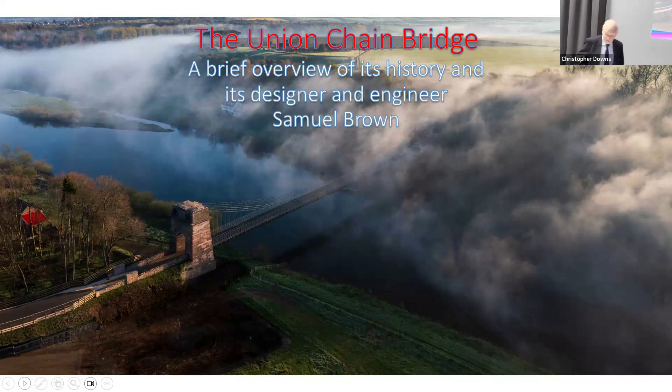I beg your pardon, there we are. In his companion guide to Northumbria, Edward Grierson in 1976 said that the Tweed is a beautiful river throughout its length, and the scene at Union Bridge is nothing less than idyllic, and so it is. I assume that most of you have visited the Union Bridge at some time, but perhaps not. It is a hidden gem. It is a Guinness World Record holder, as you probably know.

And you probably also know that within this region, we have the world's oldest vehicular suspension bridge, or at least half of it, because the other half of it is across the border in Scotland. It's a remarkable world record to hold, the world's oldest vehicular suspension bridge, down two relatively minor country roads in North Northumberland and Scotland.

It's a forgotten gem, so forgotten, in fact, that in his definitive history of bridge engineering, published in 1911, H.G. Tyrrell said that the Union Bridge was blown down in a gale only 6 months after it was completed. Well, we know that it wasn't. We know that it survived for 200 years, and following the recent restoration is likely to survive for another 200 years. But that calumny probably originated from the blowing down of a pedestrian suspension bridge further up the River Tweed at Dryburgh in 1817. I think that's where Mr. Tyrrell got his lines crossed.

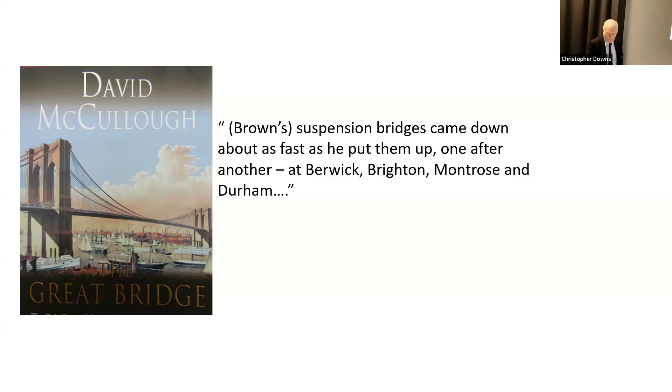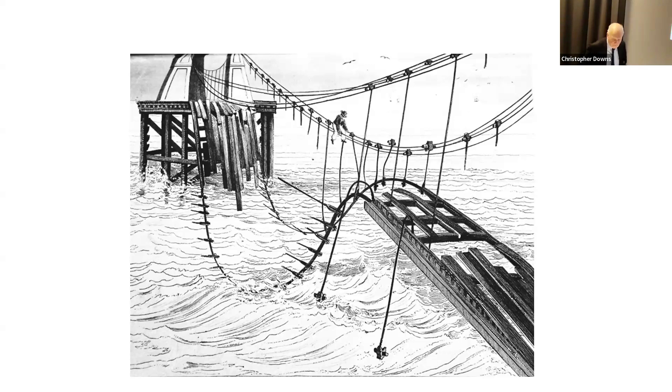So why did we need to build a suspension bridge in that remote part of North Northumberland, or North Durham as it then was? Well, towards the end of the 18th century, there was an increasing need in Berwickshire, in the Berwickshire Merse, for coal and lime, especially for the agricultural parts of the Merse, from the pits and lime works of North Durham.

Because you remember at that time, what is now North Northumberland, the ancient areas of Norhamshire and Islandshire formed part of the detached enclave of County Durham known as North Durham, as did the Farne Islands and Monk's House, that you will know, between Bamburgh and Seahouses, where the monks landed from the Farne Islands. It itself, strangely, was a part of County Durham, a detached part.

So we're talking about, in this case, taking lime and coal from the pits and lime works of North Durham to Berwickshire, which didn't have any resources like that. And we tend to forget these days about just how much of a barrier a river can be, or certainly was in those days.

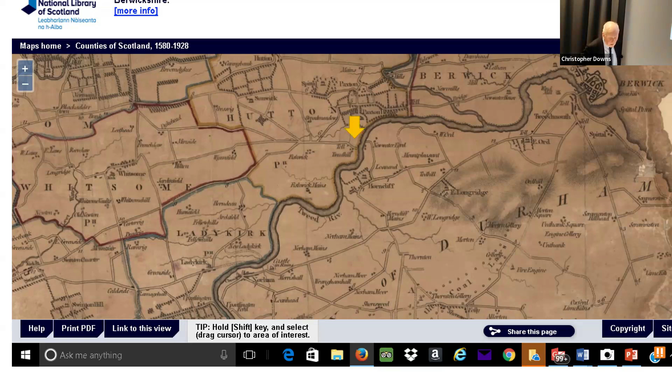He spent all his career in the Royal Navy before he moved in his retirement into the manufacture of chains. He served for the most part in the Newfoundland and North Sea stations, and very soon developed an interest in improving the rigging of His Majesty's ships by replacing hempen rigging with iron chains. And he patented a design of open chain links for rigging and other purposes, and actually persuaded the Admiralty to allow him to test his ideas on HMS Penelope in 1806. He retired in the rank of commander and became an honorary captain later in life in 1842.

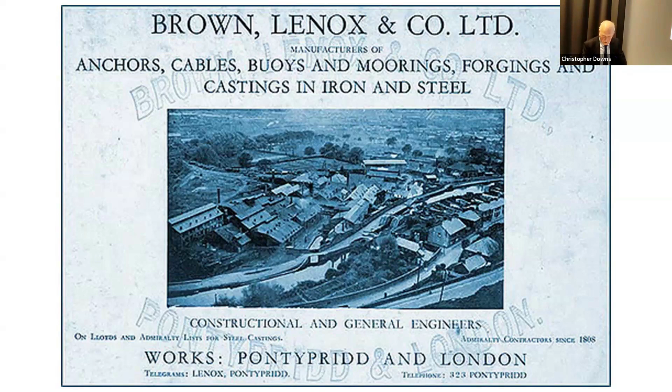In 1817, Brown took out a patent for specification for the construction of iron bridges of suspension, as he called them, and it's on this specification that the Union Bridge was eventually built. But some 15 years before that, the Berwick and North Durham Turnpike trustees had taken out an act in Parliament enabling the trustees of the Berwick and North Durham Turnpike Trust to construct a crossing of the River Tweed between the parishes of Horncliffe in North Durham and Hutton in the county of Berwickshire.

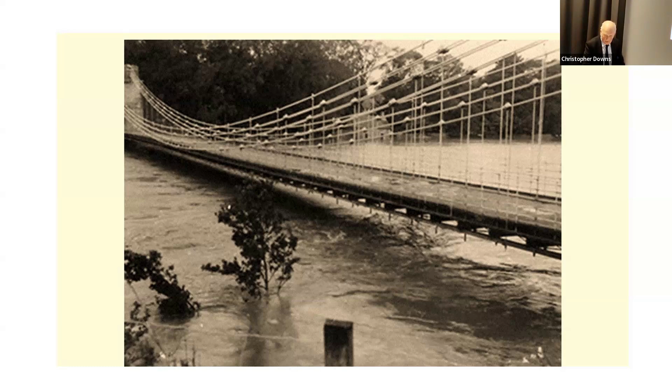So the decision of the trustees to build the bridge in that location was absolutely vindicated, and the bridge has survived in that location to the present time. Let's just have a look at the timeline for the construction of the bridge. We'll remember the Parliamentary Enabling Act in 1802. In 1817, you saw the patent that Brown had taken out 15 years after the Enabling Act.

And in 1819, the contract was let by the Turnpike trustees to Brown based on his drawings of September 1818, which themselves were based on the patent, the detailed patent that he had taken out. On August the 2nd in 1819, the foundation stone was laid by the chairman of the Turnpike Trust, William Molle, and remarkably and extraordinarily, less than a year later, the completed Union Bridge was opened by Lord Hume. So it was built from scratch in less than a year.

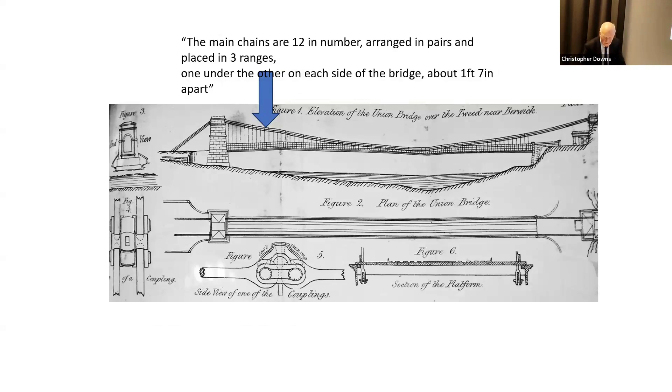Says Drewry, the main chains are 12 in number, arranged in pairs and placed in 3 ranges, one under the other on each side of the bridge, about 1 foot 7 inches apart, and the arrow points to the chain in place. There it is today, with the pairs of chains, one above the other, on each side of the bridge, forming 12 chains in total.

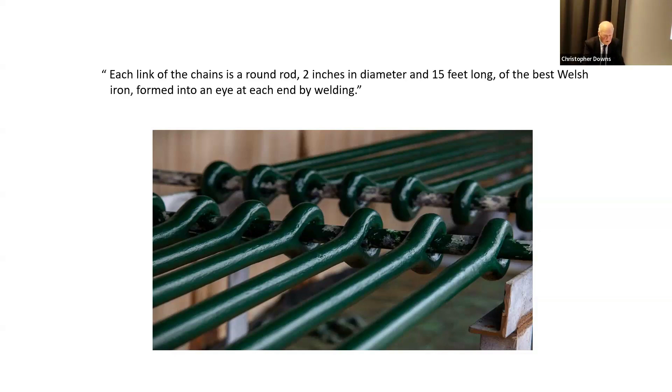There are the chain rods, 15 feet long, 2 inches in diameter. Those are as restored or as newly made during the recent restoration, and as Drewry says, formed of the best Welsh iron. Well, they were in 1820, and formed into an eye at each end by welding. The long links are connected together by short open coupling links, 6 inches long centre to centre, made of iron and united to the eyes of the long links by oval bolt pins, which pass through both.

That shows you the link itself. The 2 bolt pins, 6 inches apart. There's the pin, the left-hand pin and the right-hand pin. And I have an example of one of the wrought iron links rejected during the restoration, and the pin, as on the diagram, that fits through the link.

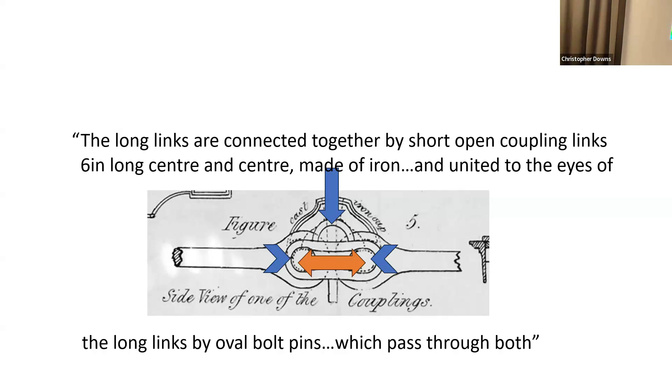Chain bars, says Drewry, 15 foot long, and they actually weigh 15 stone, with links, pins and saddle, and the hanger connecting the chains to the decking. There is the hanger leading down from the chains and supporting the decking from the chains.

Says Drewry, the chains pass through openings in the main pier on the Scottish side. The Scottish pier is a freestanding pier, the oldest masonry pier in Scotland. On the English side, the pier is actually built into the cliff behind. But the chains pass through the openings in the main pier on the Scottish side, one above the other, about 2 feet apart, says Drewry.

The links of the chains are made very short at that part, that they may lie on the rollers without being bent. Well, the chain rods on the top of the Scottish tower were 3 feet in length, just miniature 15-foot ones, reduced to 3 feet in length and weighing 3 stones.

And in my talks in the local area, I normally carry a 3-foot rod around with me in the car, but it proved too much to bring it on the train to you tonight, unfortunately.

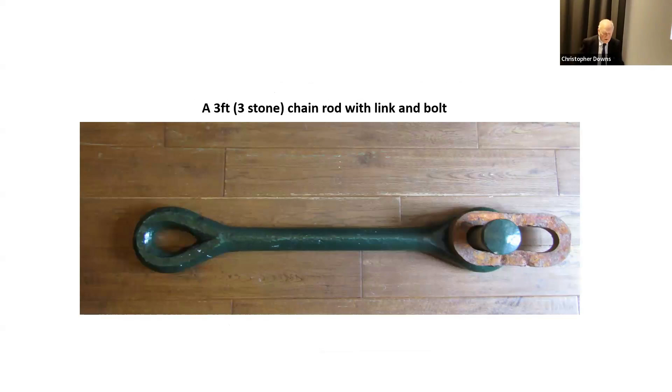But there we are. From the points of suspension, the chains pass down 24 feet into the ground and through large iron holding plates, 6 foot by 5 foot. That's in the ground on the Scottish side, about there. And they're kept down by large mound stones and other materials piled up to the level of the road. There's a photograph of the friend's 3-foot chain bar with the link and bolt in place.

Going back to the previous slide, as I've said, from the points of suspension, the chains pass down 24 feet into the ground, said Drewry, and through large iron holding plates. Now, just before the restoration began, our patron Professor Paxton's friend in Edinburgh at Heriot-Watt University, Dr. Colin Stove, who is the managing director of Adrok, a survey firm that usually does survey work throughout the world, identifying oil deposits by atomic dielectric survey, rather obviating the need to drill through the Earth's crust to see if there are oil deposits beneath. You simply use this laser survey work, saving a lot of time and trouble.

But he came and did a survey of the Scottish anchor plates before the work started, and actually showed the plates at a depth of 7.3 meters below the ground, which was very close to what Drewry said when he said they were 24 feet below the ground.

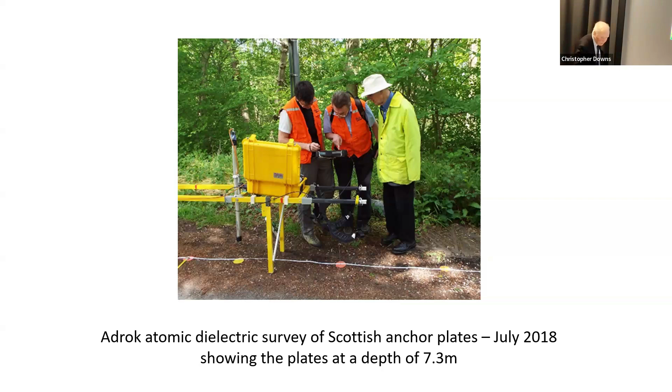Those two anchor plates, and this is one of two points where I actually encroach into the restoration, with apologies to Simon, were replaced on the Scottish side by an anchor block of about 350 cubic meters, poured over the course of 2 days. So that huge anchor block has replaced the iron plates, which are still there. Actually, the contractors, I think, Simon, didn't get as far as the anchor plates. They're still there under the new concrete, very impressive anchor block.

On the English side, says Drewry, the chains lie also upon cast iron plates laid into the masonry. The extremities of the chains are fastened, as on the Scottish side, to large holding plates of the same dimensions. But instead of being sunk deep in the ground, they're placed vertically, rather above the level foundation of the pier, and they bear against a horizontal arch of masonry dovetailed into the rock. So instead of being in the ground behind the tower or the pier, as on the Scottish side, they're actually back into the rock above the pier on the English side.

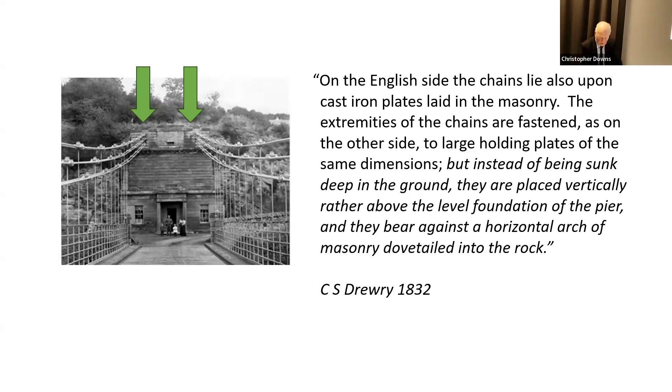And so everything went happily until 1902, when the then surveyor of the Tweed Bridges Trust, who'd taken over from the Turnpike Trust, took fright at the security and integrity of the bridge, and recommended to the trustees that it ought to be strengthened with, in Joseph Bean's words, new and additional steel wire cables, the practical effect of which would be to strengthen the bridge to such a degree as to provide an equivalent to a new bridge, because one of the options the trustees had to consider was whether to abandon the suspension bridge of 1820 and build a new one at colossal cost.

But the cost of the proposed improvement, the addition of these wire ropes on both sides of the carriageway, would be approximately £1,450, very much cheaper than building a new bridge. And the trustees agreed to that and installed the wire rope, as you see there, with additional hangers supporting the decking. And as Simon will no doubt tell you, preparatory to the restoration of 2020, it was found that the 1902 rope was doing more harm than good, and it was decided not to replace it.

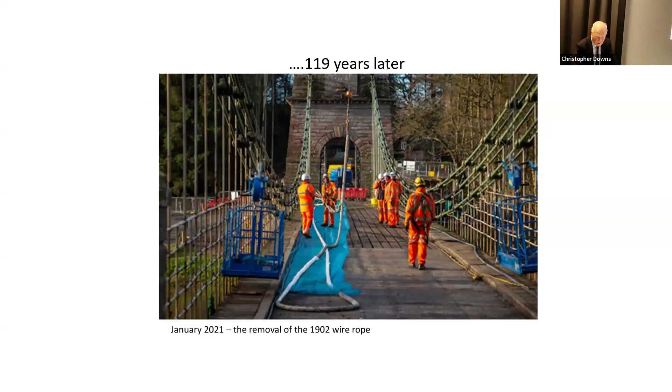Let's just go back to what is, I think, or what we believe is the earliest known photograph of the bridge in the middle of the 19th century, with its original decking, a chap taking his ease on the downstream footpath, a horse and cart just about to enter the bridge from the English side, and there is the toll house keeper, Edward Roxburgh, and his family standing in front of the toll cottage, two-roomed cottage, under the portico.

And you'll see the arrow pointing to some sort of emblem just above the parapet of the bridge, which is actually an entwined rose and thistle device above the maxim, "United strength is stronger," as they said in 1820 and have continued to say over the decades, and that plaque on the English side, and another one, an identical one on the Scottish tower, they were restored during the restoration works.

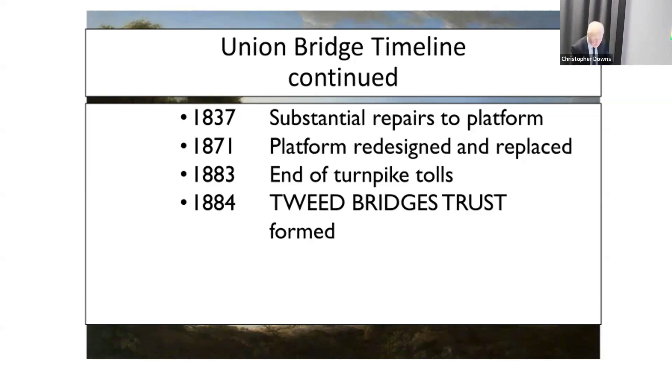The toll cottage that you saw in the picture was condemned in 1934 and demolished in 1953. And the pier of the English tower was refaced with the facade of the portico of the toll cottage pushed back into the face of the pier. In 1974, there was a complete platform replacement, and the suspension chains and the Scottish tower bearings were overhauled.

And in 1986, somewhat controversially, the Tweed Bridges Trust was wound up, and responsibility for the bridge passed to the two riparian local authorities, as I've said, Northumberland and Scottish Borders Council, but also influenced, because it's a cross-border bridge, by Historic England and Historic Scotland, Natural England and SEPA, etc., and all these agencies had to come together, along with the maritime agencies, as Simon would perhaps tell you, in 2020, to authorise the works on the bridge, and even to the extent of the lottery funding.

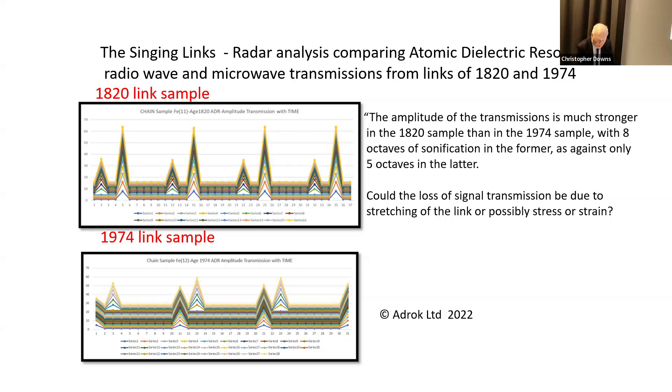And I have to say I found that a marvellous colour scheme, because on a cold autumn morning, with the mist rising from the River Tweed through the chains of the bridge, it really did present a quite ethereal image, which was quite attractive. But what we have now is, I think, as Simon will confirm, more or less the original colour scheme after the first 2 years of an all black drab structure.

Every time we went to fix the bridge, we had to get listed building consent, and I think after a number of times, they got a bit fed up with what we were doing and insisted that we wrote a conservation management plan, which is what Ted referred to. This really marked the start of the serious efforts in trying to figure out how we were going to restore the bridge. It spelled out in great detail what the current state was, what needed to be done, and what invariably would happen if we did nothing.

Northumberland County Council has its own internal capability. So over a 4-year period, we designed and brought together a restoration scheme, working very closely with Historic England. We also spent quite a lot of time working out how we were going to fund this.

We did have an original abortive attempt at National Lottery Heritage funding, but after a couple of years we went back with a different outlook, and through 2 rounds of bidding we were successful in getting the £3.1 million award. And that effectively became the seed funding that then convinced Northumberland County Council and Scottish Borders Council to contribute the remaining costs of roughly £6 million. The contract was awarded in June 2020 and works commenced on site in August of that year.

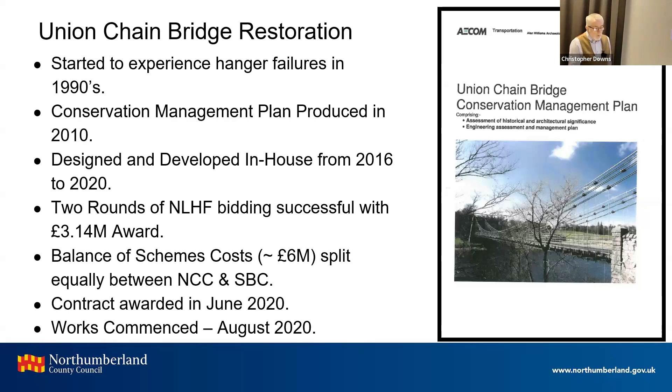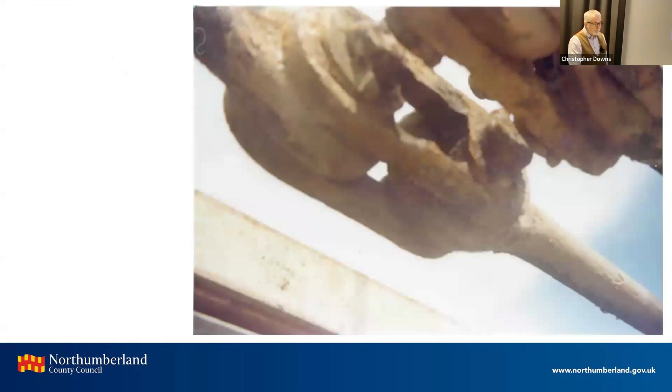We decided for our refurbishment that if this bridge was going to last for another 200 years at least, then the only real way of doing it was to dismantle it completely, look at every component, repair and replace as necessary. It seems quite a daunting task, but the bridge is actually quite a simple structure. The difficulty is figuring out how you're actually going to do that. So in that photograph, you can see we have an aerial ropeway with an underslung platform, and that's what provided the access for the works.

So starting from the English end, we dismantled one bay at a time, one bay being 3 hangers and the associated deck. You can see the access gantry suspended off catenary wires. There's 2 smaller individual man gantries as well, plus a cable crane, which traditionally is used in the logging industry to haul trees off mountainsides, but in this instance it was used to carry the removed components back to the land. And you can see there a bit more detail of the guys actually dismantling. By this point, the wire rope had gone.

The beauty of the access was it didn't really matter to us what the river did. Other options included having jack-up barges in the river. There was quite a significant flood at one point, but we carried on working unhindered.

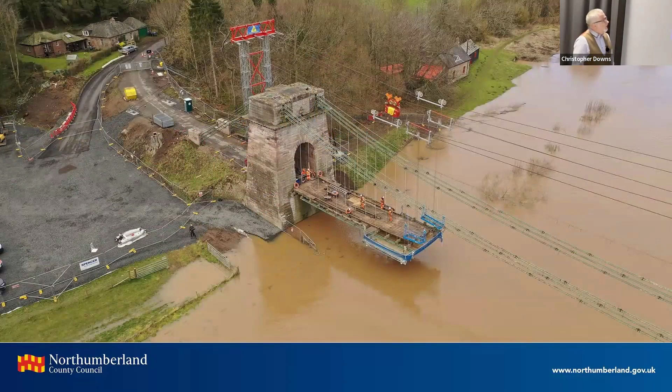Obviously, once you've taken all the deck off, the next thing is to dismantle the chains. This was done by supporting the chain on the catenary wire with pulleys and strops. If you tension the catenary wire, it picks the chain up, it allows it to be disconnected and then basically just hauled in. You can see there's a smaller cable there. All the pulleys are connected with a hauling rope, and there's a pulling winch at one end and a braking winch at the other. So basically just like drawing a set of curtains, just pull it back, take off 1 bar at a time,

repeat that. Obviously, how do you get the pulleys and strops on? Well, guys have got to walk out on the chains to connect them. There is no other way of doing it. They are harnessed on. You've done it once, just repeat it 11 more times and you end up with no superstructure. It's gone completely. All that's left are the temporary catenary wires, and you can see the cofferdam excavation for the anchor block that Ted referred to.

The planned works for this refurbishment scheme: replacement of the chain anchorages, this could be an entire talk in itself. So a new mass anchor at the Scottish end and new drilled rock anchors at the English end.

Replacement of the timber deck. I forget how many times it's been replaced in the last 200 years, but I don't think it had been touched since the 70s, so it was quite rotten. Obviously, there were quite a few masonry repairs and replacement to do. The local sandstone is quite soft and quite variable in quality and can weather quite badly.

As Ted said, 1902, 1903, I think is when it was started and when it was finished. We found in the analysis that the wire rope took less than 1% of the live load on the bridge, and that's fundamentally the difference between a solid iron bar and a wound wire rope. Completely different stiffnesses. It took no load. It made the original structure slightly indeterminate, and it caused a lot of damage because there wasn't a lot of tension in it, and it would sway from side to side, and its hangers would damage the chain bars. So that was removed. We had the refurbishment and repair of all the wrought iron hand railing,

As Ted was describing earlier, fundamentally there are 6 pairs of chains. The chains are connected together with links in black, pins, a gib key and a washer to stop the pin coming out from the links. 2 pairs of chains form a knuckle upon which sits a hanger cap, which the hanger sits in and is locked in place by a wedge.

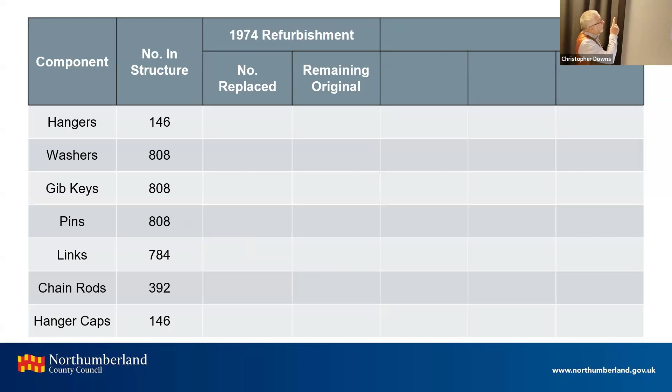In the 1974 refurbishment, they mainly concentrated on links. They replaced 744 pins with the associated gib keys and washers. And they also replaced 422 of the links. So there you can see the remaining original components after that refurbishment. The replacement components were all spheroidal graphite cast iron as opposed to wrought iron. It was thought to be the most appropriate material at the time.

So what we're going to go through is look at what we did in the 2023 refurbishment. As part of the listed building consent, we had to put forward, working with Historic England, an estimate of the number of components that we expected would need to be replaced as part of the consent process. And we'll go through all these one by one.

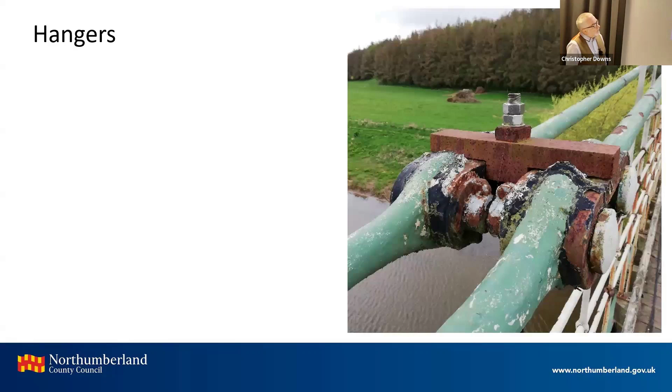The hangers were problematical because they started to break, and we were trying to understand why. For the ones that had broken, the hanger cap was put into storage, and a simple stainless steel threaded bar and flat plate put in its place. We thought the problem was because the hangers are only 1 inch in diameter. Where they fit into the hanger cap, they're actually locked solid with the fishtail and the wedge. They can't move, they can't rotate. The bridge is very lively and the deck does move relative to the chain. And we thought, having looked at the failure pattern where they had broken, it looked like it was a fatigue effect.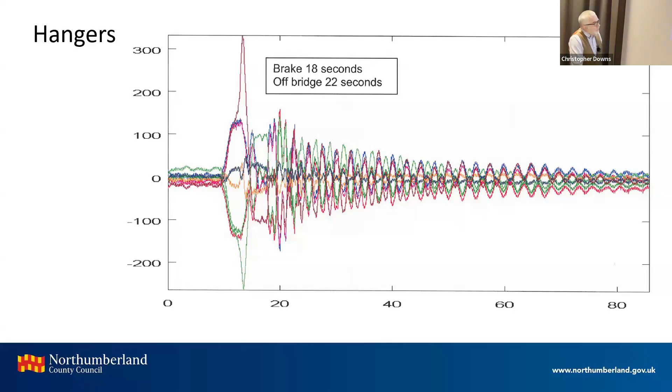So the problem was how to replace it. We looked at all different things, but nothing could replace that original detail. So the brute force approach, in discussions with Historic England, was to replace all the hangers with hangers made from high yield steel, which is sufficiently fatigue resistant not to succumb to that effect in the future. You'll notice some strange ends on those bars we call the fishtails. We decided to make that a slightly better detail.

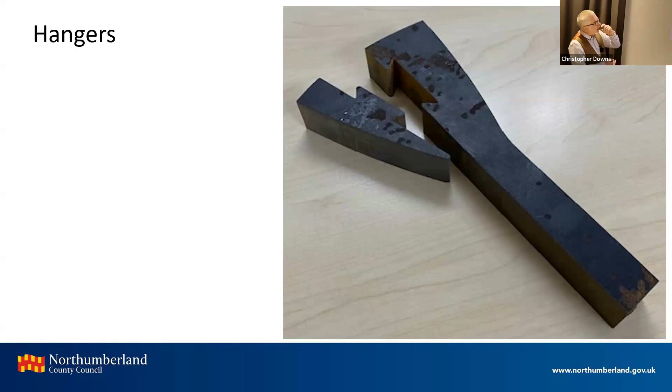The original hangers just had what we call a fishtail, which is a one-sided wedge, and then a secondary wedge that is hammered in to lock those into place. All the hanger caps are different sizes. All the fishtails are different sizes. They don't all fit together properly. They've been hammered in quite extremely, and we'll see that caused other problems later on. So we decided to have what we call the dovetail wedge.

That wedge locks in, so the hanger can be pushed up from below through the cap, the wedge put in, and then the hanger falls down. You don't need to hammer that into place because it's now too big to fall through the hole in the pocket. And it's actually got, as you can see on there, slightly curved outer faces, which enables us to rotate it to suit the angle of the chain going up as it gets steeper.

The original hangers had been bent literally in situ, sometimes one way and then the other when it was too much, and that in itself would have compounded the fatiguing issue. And these were all, again, all high yield steel that was welded on the end of a 1-inch rod. So obviously that was agreed in the listed building consent to replace all 146, and it meant that there were now no originals remaining.

Looked at washers next. You'll see there were only 64 original washers left. They unfortunately had succumbed to corrosion. The pins and washers that weren't attended to in the 1974 refurbishment were generally up towards the higher end, towards the Scottish Tower. Now, whether access was just too difficult to get up there, I don't know, but that's generally where all those components were concentrated. So they were replaced with, again, high yield steel, laser cut from flat plate.

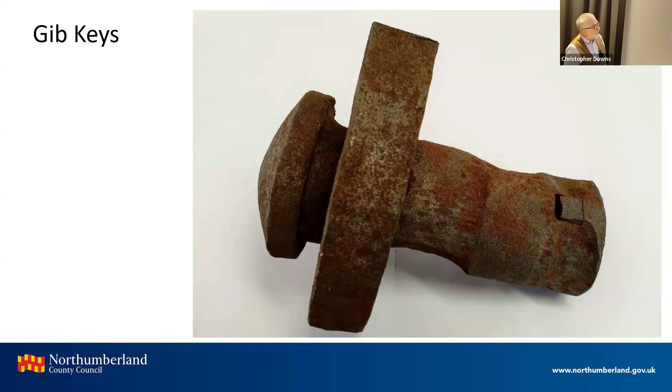Same goes for gib keys. Of the 64 original gib keys left after 1974, they either were fused into the link and couldn't be removed, which you can just see at the far end there, or they broke when they were being removed due to excessive corrosion. They were quite a simple element that was just laser cut from flat steel plate. Only 203 of those were replaced. A lot of the 1974 ones were reusable.

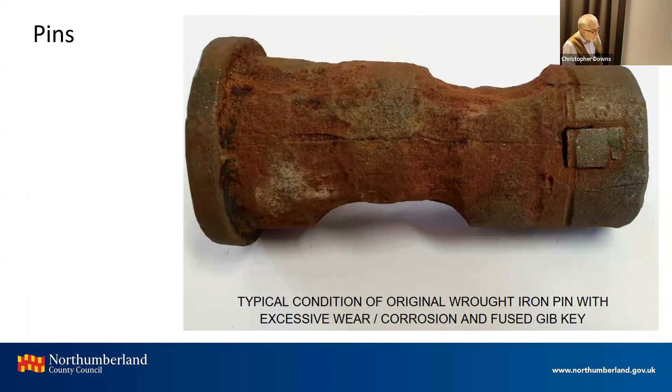Again, with the pins, only 64 original ones. That was a pin recovered from the top of the Scottish Tower. There's not a lot we can do with that, unfortunately. And one of the problems with wrought iron is there aren't really any repair techniques available for structural components like that. Unfortunately, quite a few of the 1974 spheroidal graphite pins had cracks and casting defects in them, which meant they had to be replaced as well.

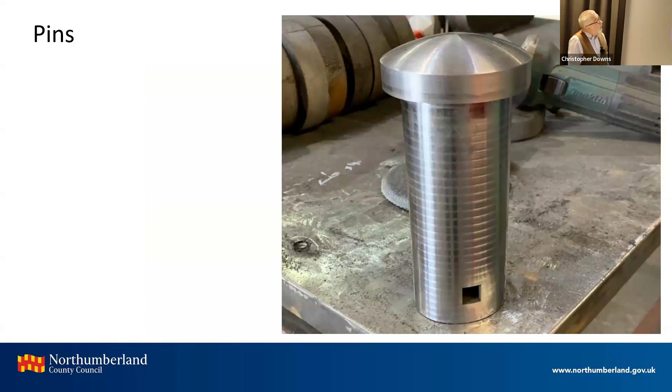The pins were quite unique, as I think Ted mentioned. They were oval in shape, in a sort of round link, which just concentrates the bearing pressure. They were all CNC machined out of billet steel, quickest, most accurate way of making them. We'd consented 100, we replaced 103. So all the original 64 plus a few of the 1974 ones.

The links are a little bit more interesting. After 1974, there were still 362 original links. Oh, Ted's taking them back. There we go. It's one of the original wrought iron links. When we started to look at these, once they were all blasted clean, you can see quite a lot of section loss on virtually every wrought iron original link.

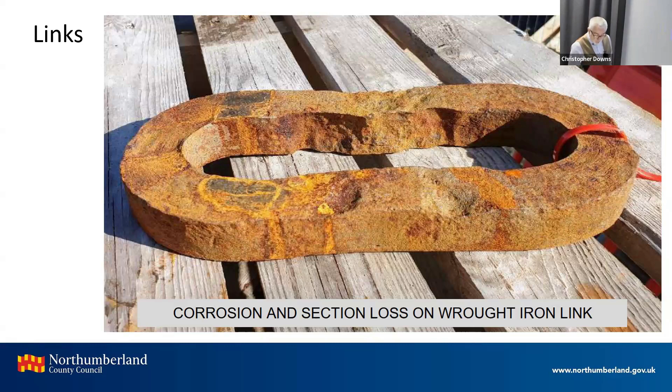Because these were original components, and we wanted to try and keep as much original stuff as possible, we did some quite complex finite element analysis to try and understand what the absolute minimum cross-sectional area of metal was that we could get away with in the design. Unfortunately, there wasn't enough material left in any of the original links, so they had to be replaced.

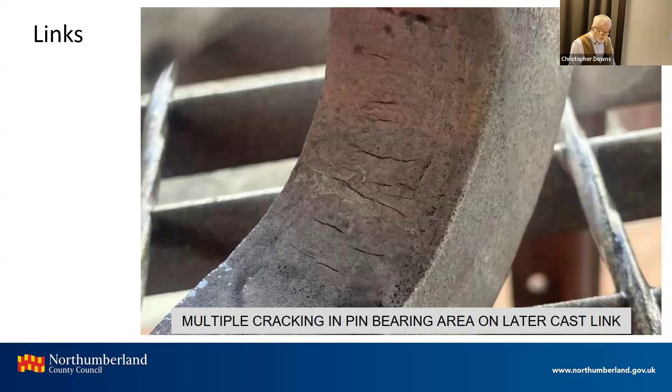Unfortunately, in some of the 1974 spheroidal graphite links, we found heavy porosity and some had cracking on the pin bearing surface, so we had to replace all of these. They're again quite simple parts to make, laser cut from plate and hand finished. So of the 362 original links, they were all replaced, plus about a quarter of the ones from the 1974 refurbishment.

Chain rods. When we blasted all the paint and various other items off the chain rods, we found the main shafts themselves were fine, but all the eye ends had different degrees of corrosion. Some were quite severe. Some made us wonder, actually, what residual capacity was left in the bridge, what factor of safety it was operating at.

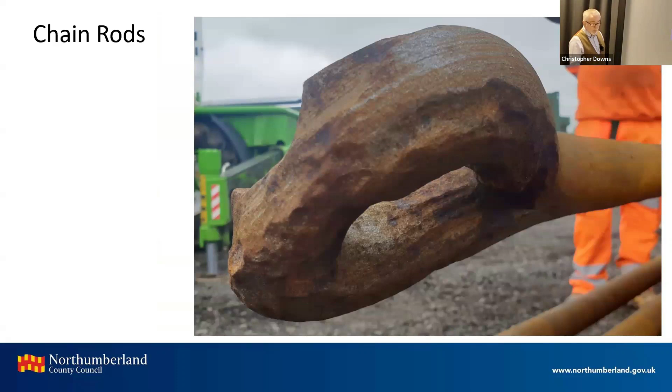Again, being original items, we wanted to try and retain as many as possible. So again, we used finite element analysis to understand what was the minimum cross-sectional area we could get away with. And we'd spent, well, I made Ryan do most of it, Ted, but a lot of time measuring all the eye ends of all the rods.

What was interesting is, because there was a 25% range of sizes, you could have one that looked very corroded, but there was enough metal in there because it was a big one to start with. Whereas you had some that had hardly any corrosion at all, but were that small that it didn't take much to fail them.

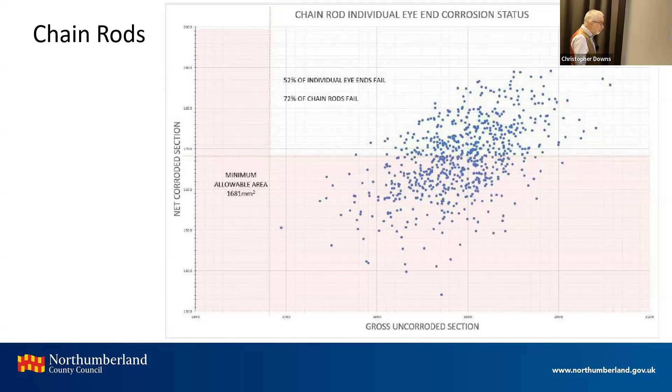And interestingly, it was only 52% of the eye ends failed, but there's one on each end of a rod. So it meant that overall 70-odd% of the rods couldn't be reused. So the next conundrum was, well, how are we actually going to replace them? And the fact that they varied in size by 25%.

So bang up to date, we decided to make some mock-ups, 3D printing them, and then look at actually trying to assemble them with the existing components that we had until we determined on what was a reasonable average sized eye end to have, because we weren't going to make a load of unique ones again.

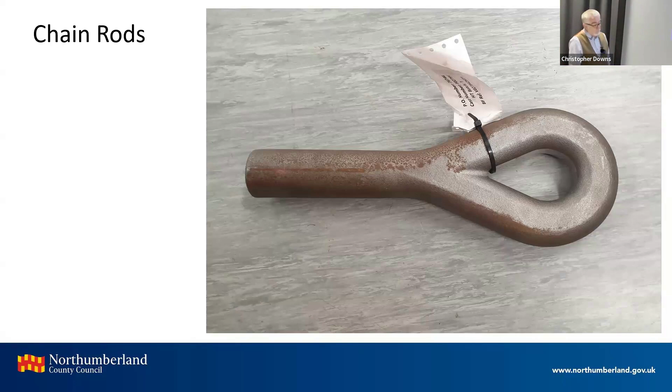That 3D printed model was used to make an extremely expensive machine tool, and the replacement eye ends were upset forged from blanks. Quite a lot of them. These were put into jigs to be welded onto the plain round bars. As you can imagine, that's quite a critical weld of a component that's purely in tension.

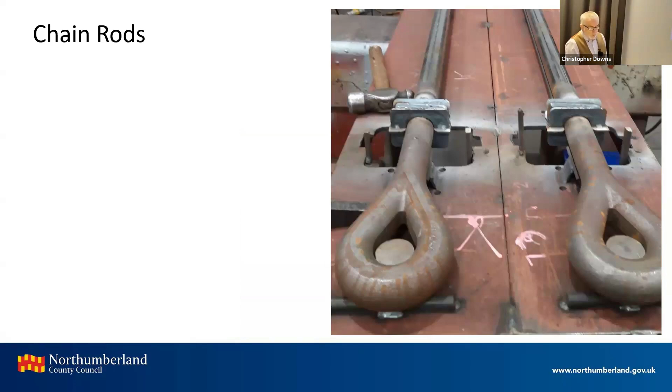I think you can see from the guards around the weld there that the whole concept of the welding was to avoid having stop starts within the weld itself. So there's a lot of additional weld material. That's after the guards have been cut off, that all had to be sort of flattened down. That's the rods after they've been linished. That's after they've been MPI'd and before they went for X-ray.

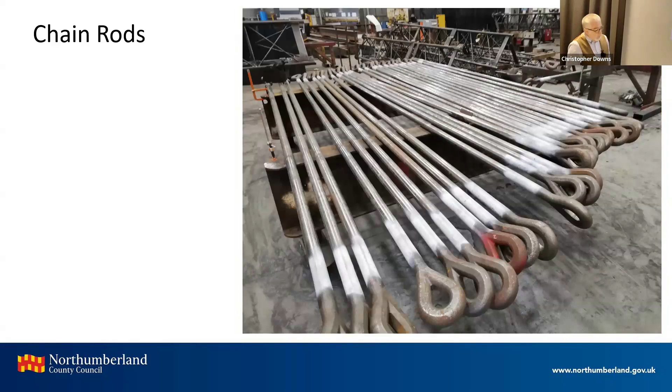Every weld was X-rayed. Initially, quite a lot of them failed. They had to do some improvements to the welding techniques. And ultimately, we ended up with managing to retain 110 of the original rods. 282 had to be replaced, but we kept 110.

They all went back in the place that they came from. So although we got lots of new rods, everything was tagged. We knew every single component where its original location was. So the original ones we put back in the same place.

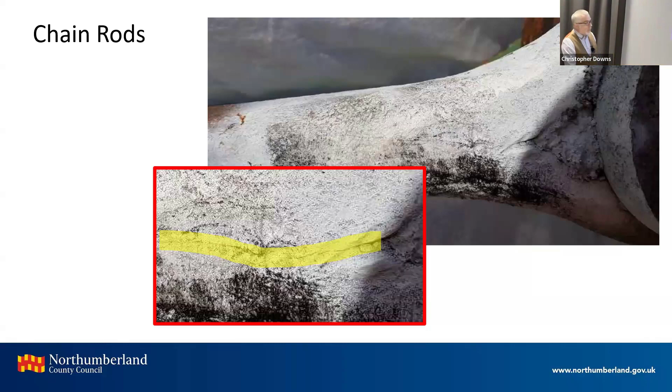When we got them down and blasted, you can see probably 3/4 of the rods exhibited what appeared to be that crack. You would think a critical location. But because so many rods were like that, our view was it was probably a characteristic as opposed to a defect. And thinking about how these were made, I know Ted mentioned in the quote about them being welded.

They were forge welded, which is effectively battering two pieces of nearly molten metal together and fusing them. So you can see this one would have been made by wrapping the link round in that direction back up to meet the bar. And we thought that the very edges of that bar would cool down so quickly, because the body of the bar would retain the heat, but the edges would cool that quickly that there wouldn't be enough heat for them to fuse.

So what we did was we took a number of the chain rods that were going to be rejected because of corrosion, took them away, sliced them up and examined them. So that one in particular there, once you cut it open and examine it, there is no defect inside. It is just a surface defect from the very edge, just cooling and not fusing. You can see it's all fused in there. You can actually see in that some of the laminar nature of wrought iron.

So that meant every time we saw what appeared to be a crack, it was okay. It was just a characteristic of the way it was made, and it was perfectly acceptable to retain those rods into the works. So that's how we managed to maximize the original ones.

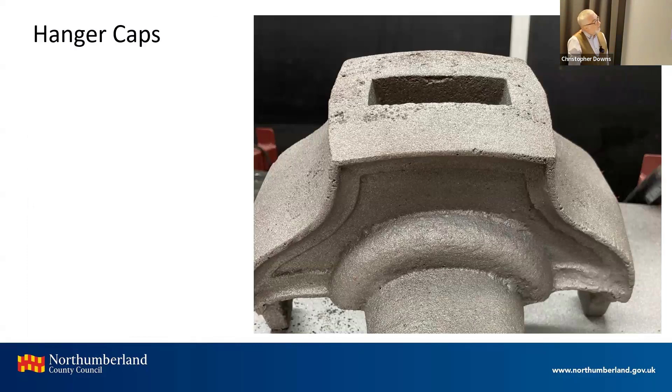Hanger caps, 146 of those. They're quite a unique part of the structure as well. They'd been up there for 200 years, covered in 24 coats of paint. Nobody really looked at them. So when we took them down and blasted them, much to our disappointment, we found that nearly all of them had cracks in the corners of the hanger pockets. Most of them had at least one. Many had two. Quite a lot had three, and some had 4 cracks, one in each corner.

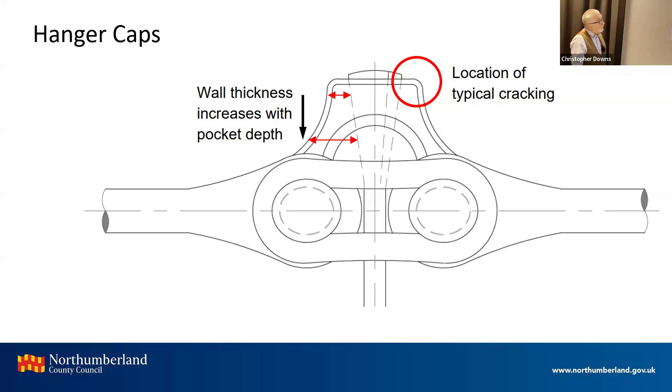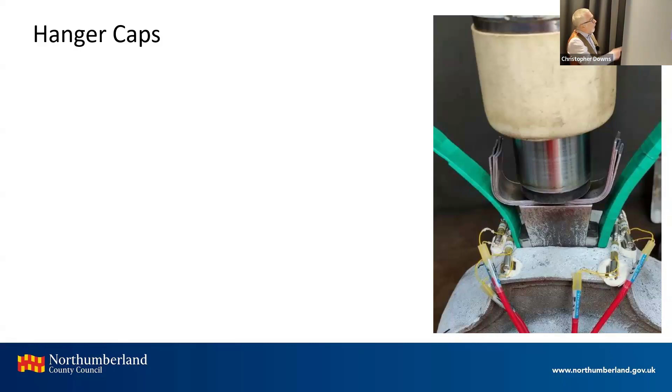So what we thought we would do is to test them. So we took some of the hanger caps that were badly cracked and some that were going to be rejected for other reasons. And we set up a little test rig in a container where we could shut the door and monitor it with a camera just in case. We fitted incredibly precise strain gauges to these in each of the corners, and then had an arrangement where we pushed the fishtail in, used 2 half wedges just so we could centralize the load. And we had 4 loading regimes going up to 5 times the maximum working load each time, going up in increments and seeing what happened.

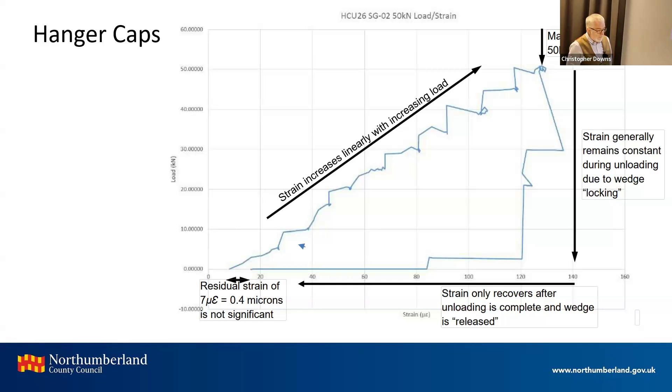When we repeat the same tests, but going up to five times working load, you can see that initially it's a linear relationship, then it goes non-linear, then there's a bit of an immediate settlement, and then once we finish, there's a permanent residual strain that tends to indicate crack propagation. So those cracks were starting to get bigger under that loading regime. So this testing allowed us to understand what was going on and determine that under the normal range of loading, those cracks were not going to propagate, which meant we could retain the hanger caps.

We concluded that the cracking had been caused by them hammering the wedges in. Like I say, all the hanger caps would have been cast in molds, but all those pockets were different sizes. All the wedges were different sizes. The fishtails were different sizes. There was no lead packing or anything like that to distribute load. So these things had to be hammered in, because if you didn't hammer the wedge in, the hanger could actually pull out, which is why we designed ours slightly differently, so that you didn't have to hammer them in. So the only conclusion we could come to was that the physical distress they had been subjected to initially when it was built, to ensure the hanger wouldn't fall out, was what caused the cracking.

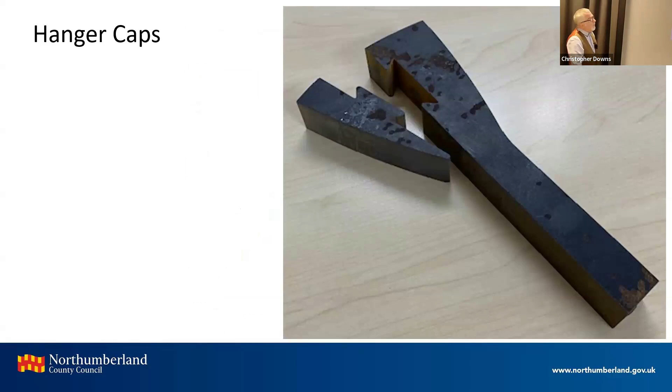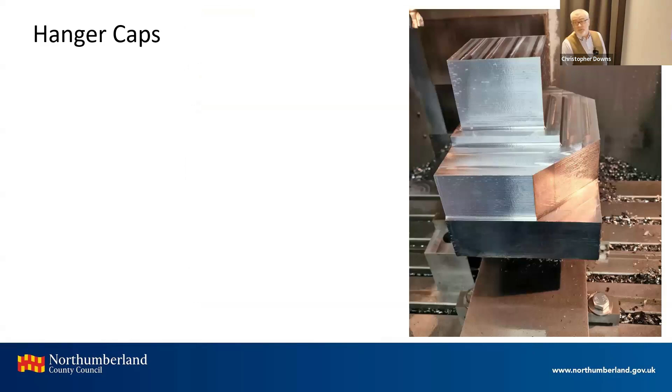There were a handful of caps that had to be rejected for various reasons. On one, you could stick an entire biro in some of those holes and it just disappeared, and that's the main wing that supports the cap. And there were a couple that were just incredibly poor castings to start with. The new ones were again CNC machined from a 3D model. That was quite a complex process. And again, we had to come up with an average sized cap. They were all different sizes, but we had to determine what would be a nice average size to fit every location.

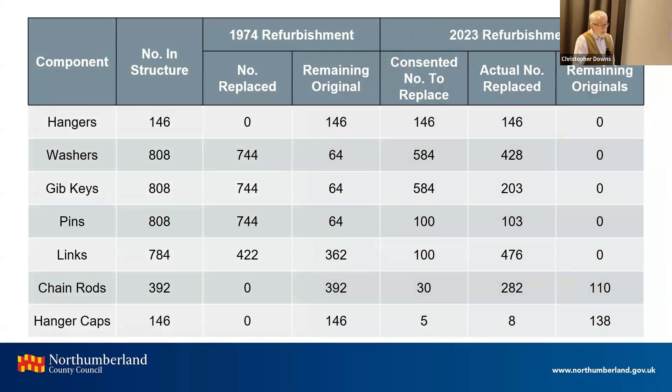And that meant that we only rejected, we thought we might have to replace 5. In the end, we only replaced 8, so we managed to keep 138 of the original caps. Which brings us on to this whole question of originality. I mean, Ted alluded to the number of times the deck had already been changed before 1974.

And we had worked very closely with Historic England all the way through this. And at the end, when we finished and presented the report on all the retention issues for components, this is what they had to say. You know, the principle of repairing the Union Chain Bridge has accepted from the start of the project and through its planning permissions the need to retain the structure as the world's oldest chain link bridge still used for vehicles. It follows that its components need to meet modern structural and material standards.

And they also said that they considered that the degree of proposed replacement was justified, that some of the wrought iron components had already lasted 150 to 200 years is a testament to their manufacture and the design concept. But the analysis shows the degree to which the majority have reached the end of their working life. Replacement of its chain link structure is an inherent factor with this type of bridge, and replicas in modern materials can be accurately detailed to ensure that the bridge both functions and appears as originally designed. And that's the key thing, it functions and appears as originally designed.

What Historic England wanted was people to enjoy the bridge as an entity, as opposed to an original preserved item that you wouldn't be able to use. You know, we were heading towards the bridge being pedestrianised and then ultimately closed, but we've ended up with something that people can use freely.

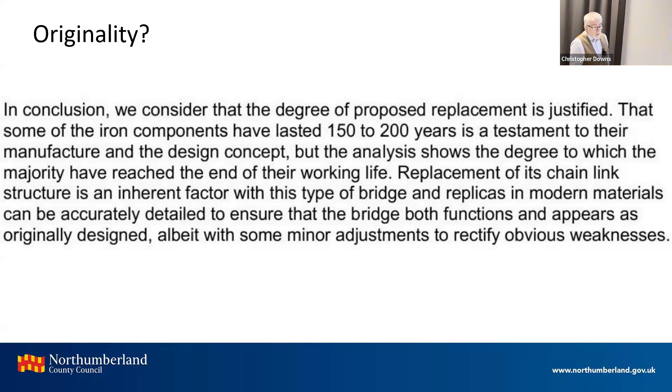One of the reasons we did 2 principal inspections, yet we still, from what I've talked about, you would think that we'd got a little bit caught out. And to be honest, we did with the condition of some of the components. Ted's already stole my thunder and shown that slide, but a lot of the components had never been blasted. They'd just been repainted over and over again. So there was quite a thickness of paint that masked a lot of things.

We also disappointingly found that in the 1974 refurbishment, when things were reassembled, a lot of flexible filler had been applied to corroded pins, painted over, and these were then hidden behind the links. If we'd known to look for it, we might have looked a bit closer, but we didn't. And there was nothing in the records for that scheme.

Was that Beaumont egg? Beaumont egg? The filler. That was the filler that failed on the bridge at Dundee over the time.

No. So, yeah, maybe we could have done more inspection at the time. But no matter how much inspection we did, you would still have to dismantle everything to be sure that you could get your minimum 120 year, another 200 year design life out of it. So fortunately, we did dismantle it and not try to do things in situ.

So the reconstruction. Did anybody try to fix their own car years ago using a Haynes manual? Yeah? You remember that, wouldn't you? Yeah. Never a true word was spoken.

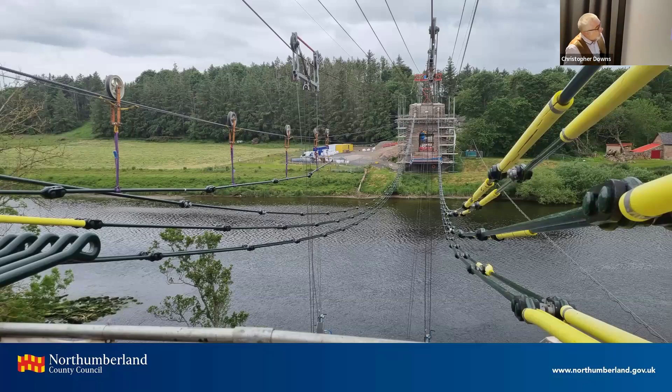So having pulled all the chains off the bridge, we need to pull them back out, simply reversing the process. So they were hauled back out on the catenary. The catenary's held high with tension in it until the chain's in place. The pins are put in to connect it. Then the catenary's slackened off and the chain drops into place. Do that 12 times, you've got a set of chains. The replacement chains inside the English tower had a Macalloy spade end on them, so we could actually adjust the length to trim them all to get them all at the same height.

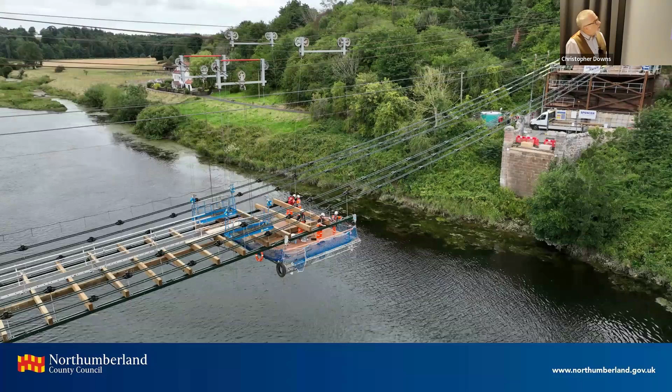With the chains in place, it's back to hangers, timber, cross girders. You can see the longitudinal stringer and bowstrings that help to support the deck timbers. Again, working back towards England. You can see that's the gantry in use there. Once all the timber decking's on, we put the timber deck back as originally as possible. Yeah, so timber BT ducts, they're not original.

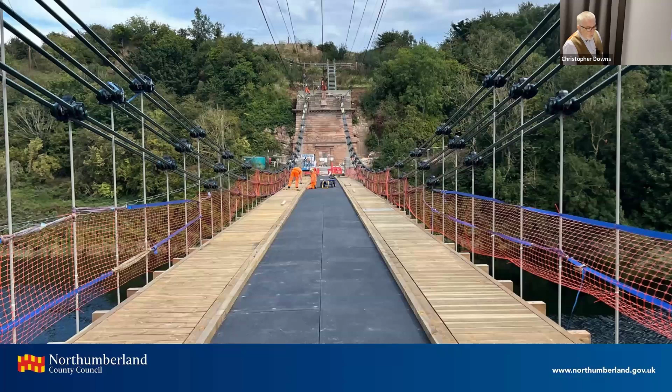We did depart, when we came to do the restoration, there were Acme panels on the road decking, and we've replaced them with, it looks identically the same, but they're actually GRP, so should last a lot longer. Footways on, nearly completed. All that was left was to dismantle the temporary works.

As we said, for all of those that worked on the bridge, there's one thing that's remarkable for us. One day there was a bridge, and then there was nothing, and then we put it back.